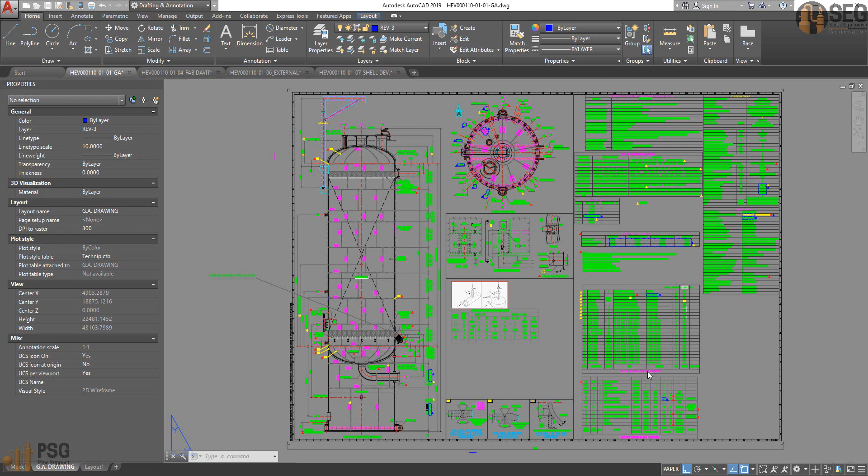This is Ahmed Hijazi, and today, inshallah, we will make this vertical vessel by using SEG software. As you can see on this vessel, on the bottom head, you have segmental pieces on the bottom head, and each course of the shell courses includes 3 welding lines.

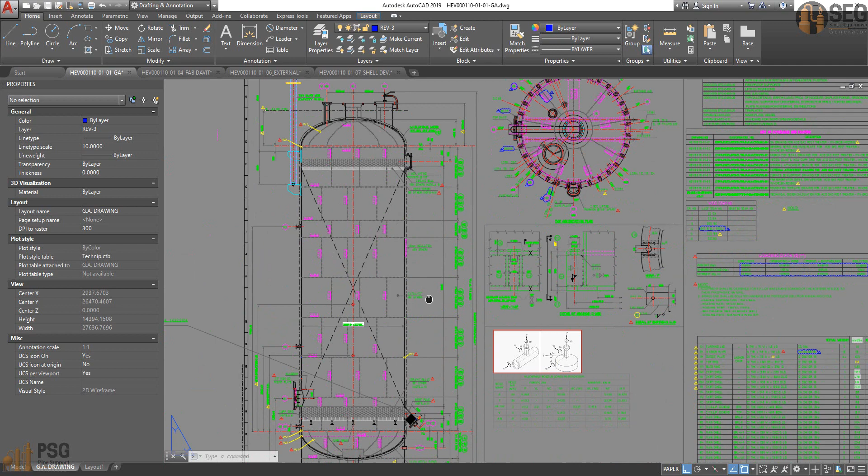And if we take a look at the top view, we can calculate the number of segments on the top head, and from here we can get the orientation of the longitudinal welding lines. Here on the support skirt, you can figure that in this skirt we have 3 cans. Here's the first can length, thickness and material, and the second can and third can information.

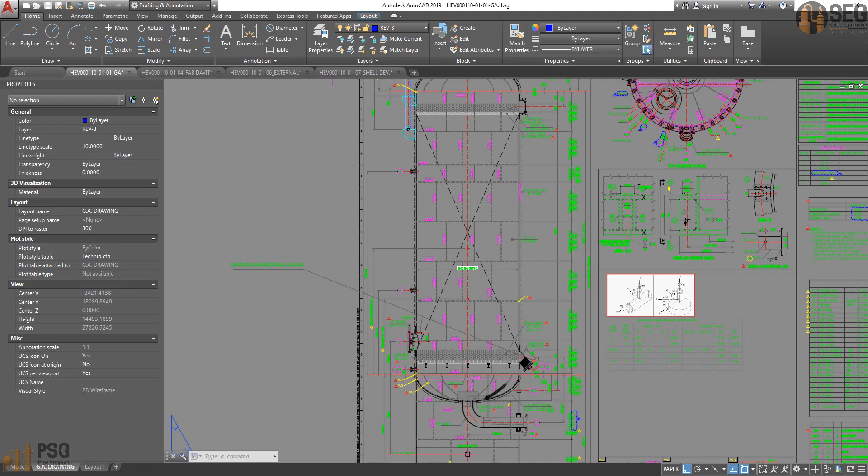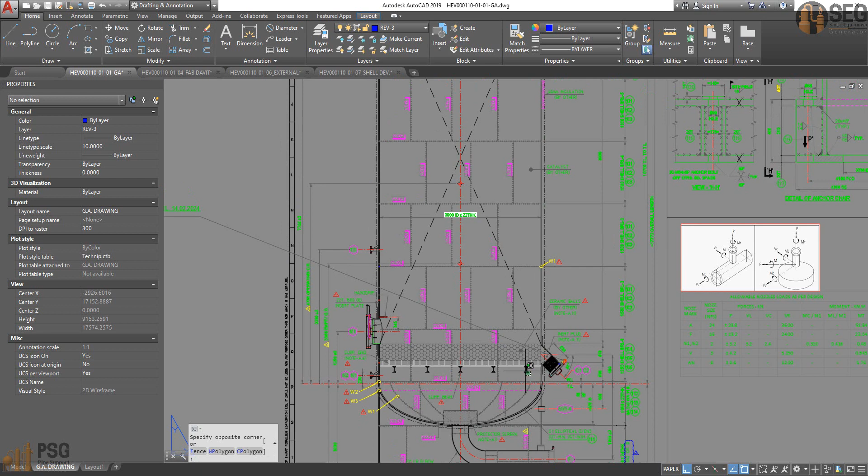Now let's start creating the main vessel items by using SEG software. In this part of the tutorial, we will create the main elements of the equipment, like the bottom head, all cans, the top head and the support skirt. In the other parts of the tutorial, we will discuss the other parts like nozzles and the top davit. After that, we will discuss the internal components like the support beams and some of the external components like the platform clips. Okay, now let's start our project from new.

We will create a new project, and from here let's add the vessel name and select the project location, select the desktop, and from here let's select the vertical pressure vessel and select finish. By selecting finish, SEG will start creating the project folder on the defined location. Here we have the vessel name, and now let's edit the equipment setting.

Here, as you can see, the position automatically becomes vertical and starts the assembly direction from bottom to top. You can define the service, you can change the vessel name from the tag, you can add a serial number. Now let's define the plate length to be 6 meters and the plate width as 1.5 meters. So from here the available plate dimensions will be automatically

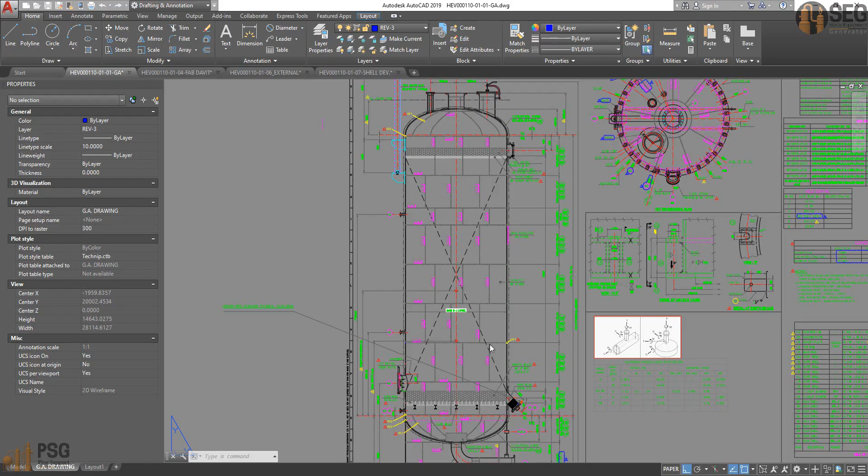used in SEG. We can change this value to 5 meters, because if we take a look at the bill of material here, the maximum plate length is defined as 5 meters by 1.5, so we change it to 5 meters by 1.5. And now let's click save. Now let's add the first element.

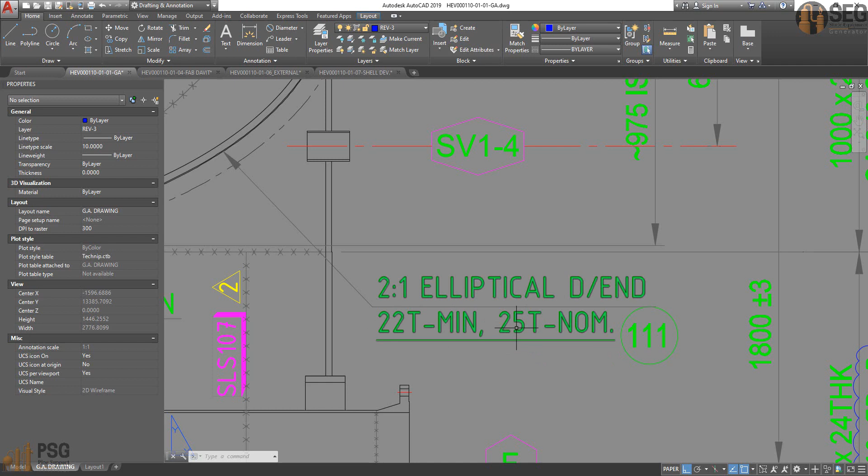If we take a look again at this bottom head, we can figure that it's an ellipsoidal head 2:1 with minimum thickness after forming 22 and nominal thickness 25, and here the straight flange is 50 millimeters. So from here let's add the first head, which is the bottom head. Let's select the ellipsoidal head with crown and knuckle radius,

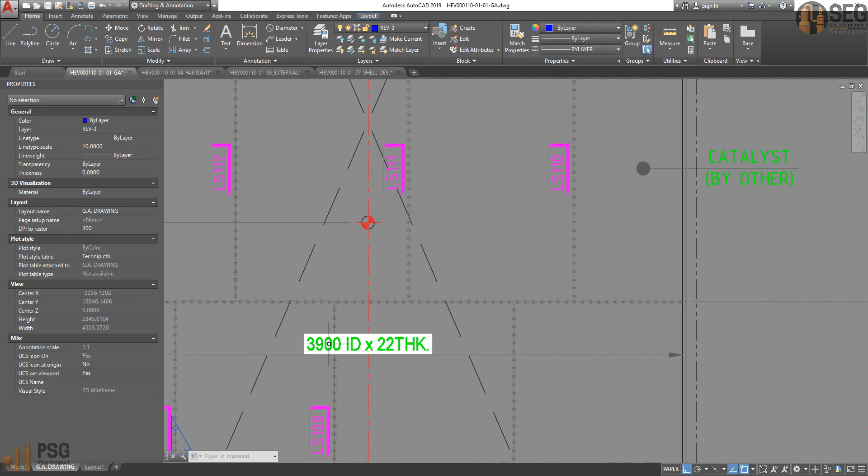and from here let's define the inside diameter. It's 3,900. If we take a look here at that value, we can get the inside diameter for the vessel. So here we define the inside diameter, and for the thickness, the nominal thickness is 25, straight flange is 50, and minimum thickness after forming is 22.

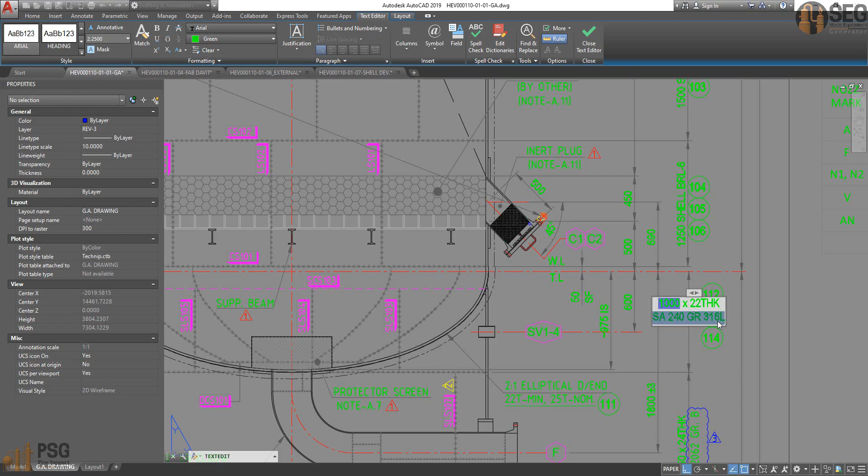And the material of this one, if we take a look here, it's SA, so we can copy that value and paste it here directly, or you can search for it like 240, so you will get the grades, and you can select the grade directly from the list, or you can type it from here.

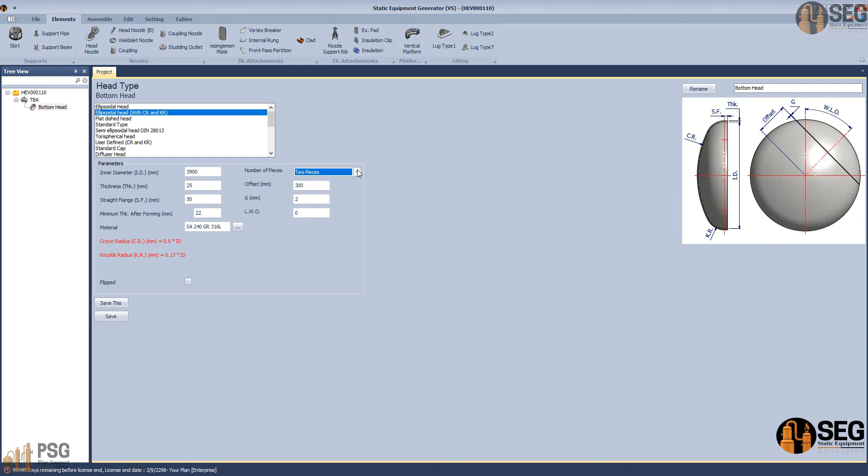This head is not a one-piece head, it includes segments. If you select the second type, you can figure that it includes a single welding line, but when you select more than 2 pieces, you can add some segments to the head. Now let's take a look at the top view to calculate the required number of segments. Here we have first, second, third, fourth, fifth. Now we have 9 segments in this head.

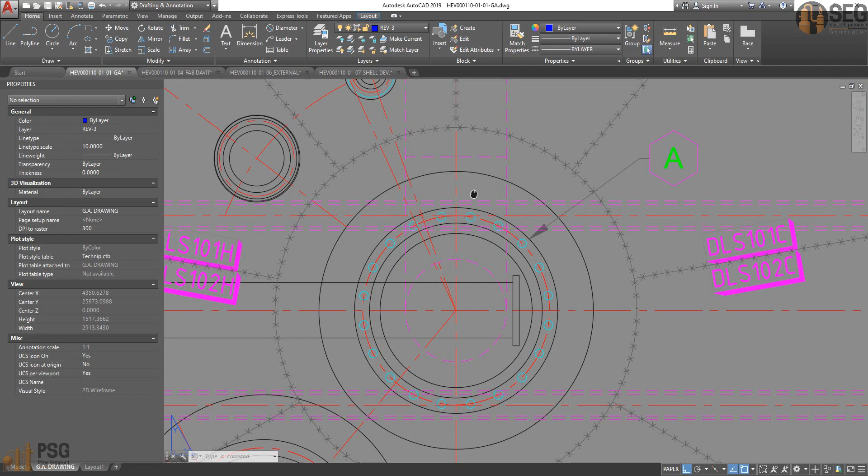So from here, let's add the number of segments as 9, and let's measure the cut length. Let's get the diameter tool, and here it's 1450. So let's define that as 1450, define the gap as 0, and the first longitudinal welding line orientation is at 0 degrees. So we will keep those values like that and click on save.

Now when you click on start assembly, SEG will automatically start creating the assembly of the equipment and creating the head assembly as a head from segments. As you can see here, everything runs in the background.

Nothing appears on the window, but after creating the head assembly, it will be assembled to the final assembly of the vessel. So if you would like to make a rendering for the element during creation, there is an option that gives us this ability.

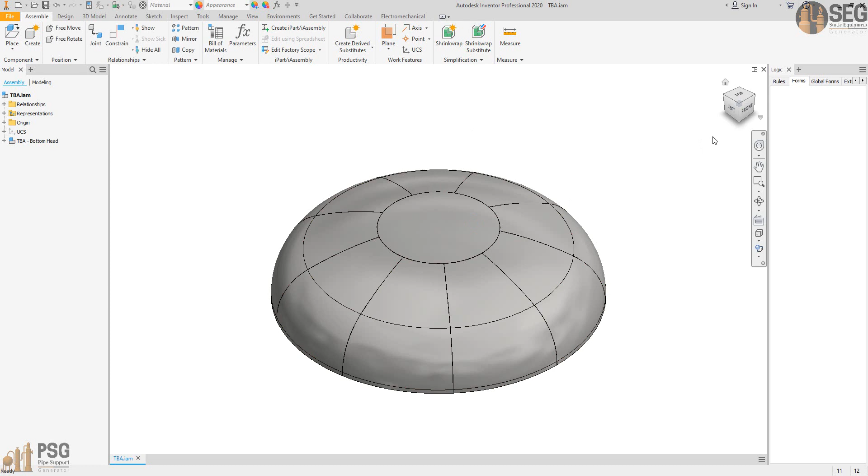Okay, as you can see here, the head is not in the correct direction. So we need to flip the direction of the head. So from here, we need to select the flip direction. That's the first point. And on the second point, as we discussed, we will need to make a rendering for the elements as a parent or a child during creation.

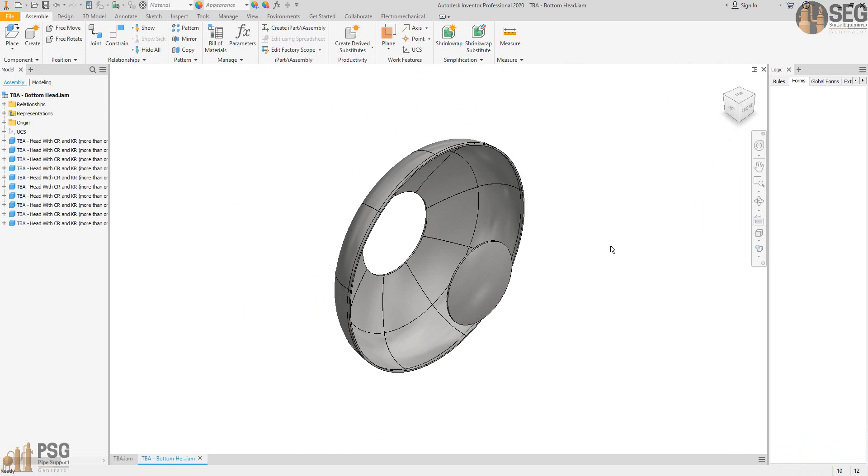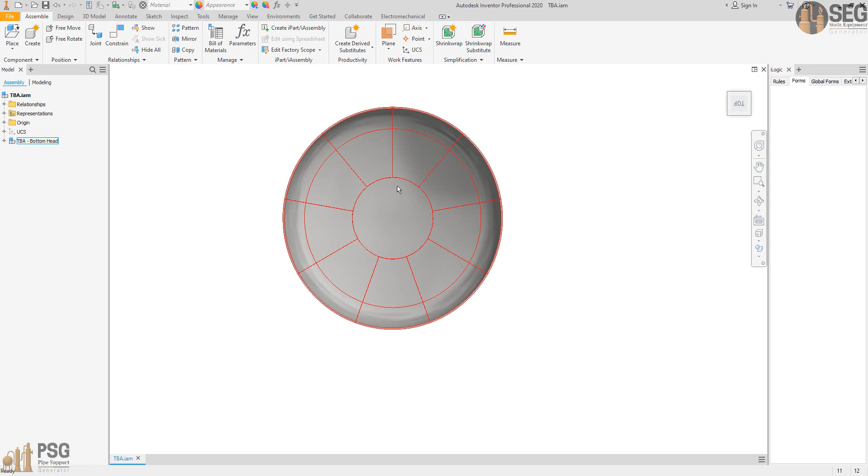So from here, let's select those options, and from Start Assembly, let's rebuild the head again to adjust the direction of the segments, okay, to make this head with a flipped direction. Okay, now this head will be assembled, and now we have this head. If we take a look from the top view, like that, as you can see, the first longitudinal welding line orientation at 0 degrees, it will be like that.

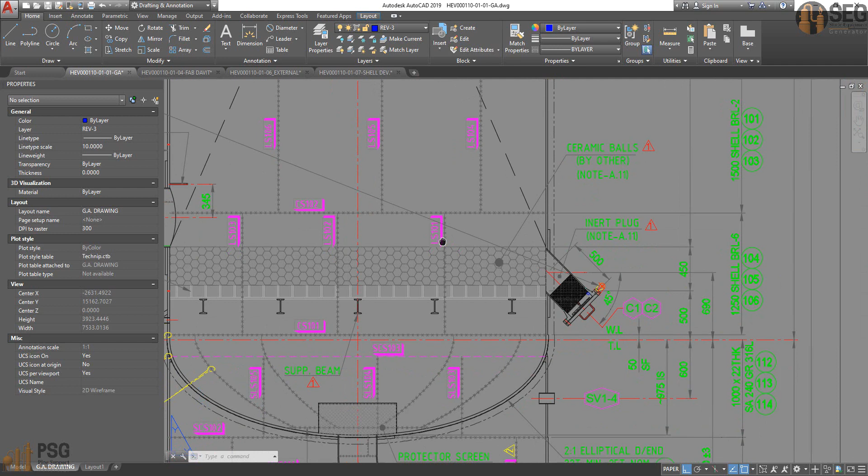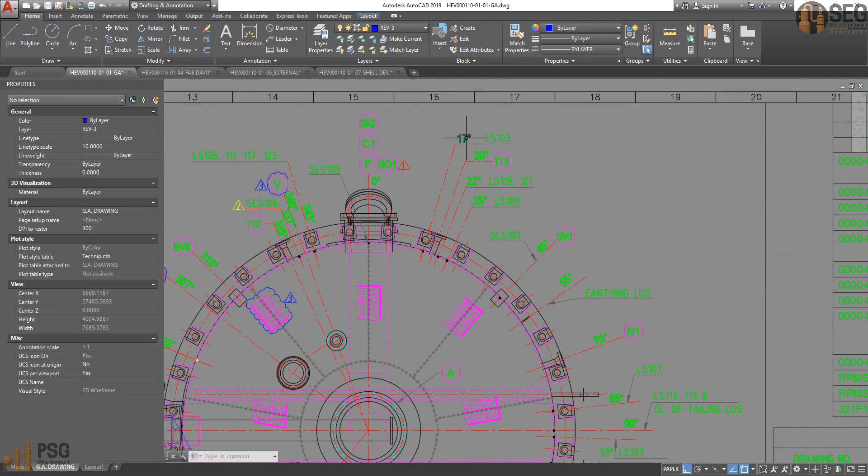Now let's add another element, which is the first can. So from here, if we take a look again at the first can, which is that one, it's 1250. Okay, and here we have 3 welding lines, LS101, LS102 and LS103. So let's check the orientation for LS101 on the top view. It's at 85 degrees. And the second one is at 231, and the last one, LS103, is at 17.

So now let's select the suitable item for that. From elements, let's select the vessel node. After that, select the can, and let's add shell 1. And from shell 1, let's select from this list shell from different pieces, which is that item. That item will give us the ability to define the required number of shell plates inside this can, and we have the ability to control the length of each one.

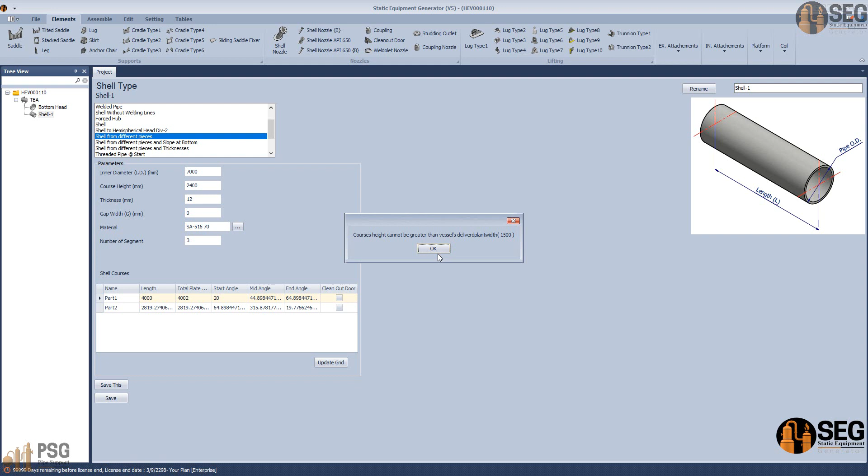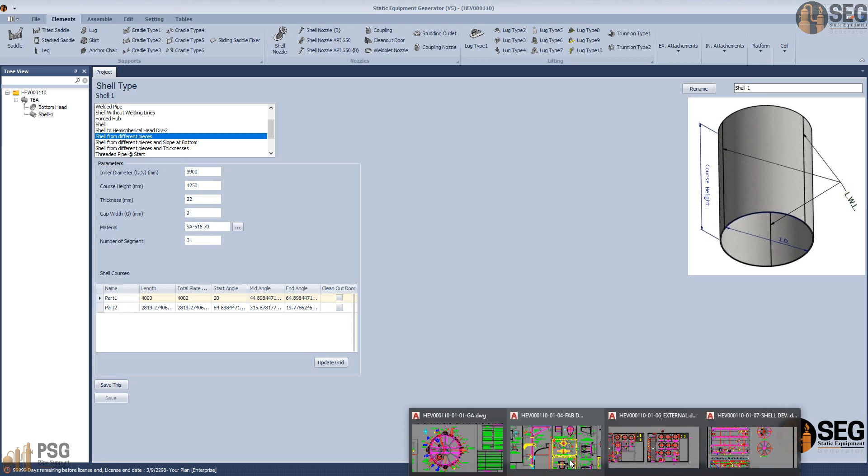Now let's define the inside diameter of the can. It's 3,900, and the height is 1,250, and the thickness is 22 millimeters. For the gap we could keep it as it is, and for the material we can copy the material directly from here like that and paste it here. And for the number of segments, we have 3 welding lines.

So if we change this value to 5 meters and click update, as you can see here, SEG calculates directly the length of the last one, because we defined the plate length in the setting of the delivered plate dimension option. So from here, as you can see, the length of this first plate becomes 5,000 millimeters.

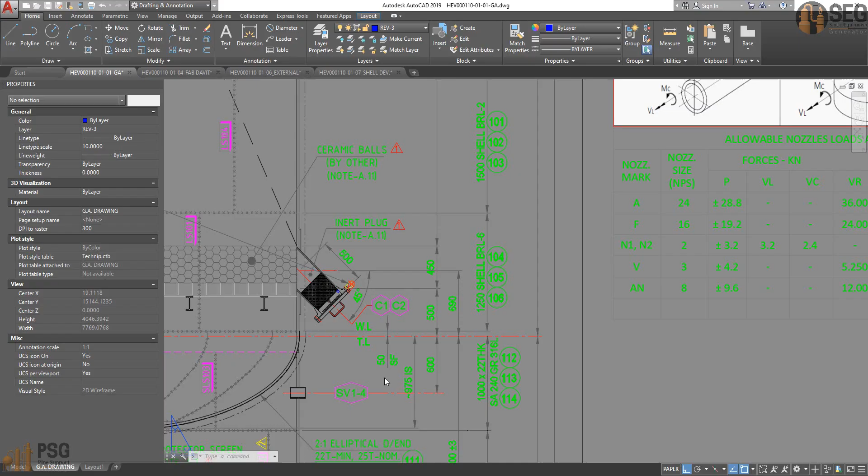And now let's define the longitudinal welding line orientation of the first can. It's at 85 degrees. And now when you click on update, as you can see, the longitudinal welding line orientation when the length of the first can is 5 meters is 231. So let's take a look here. The first longitudinal welding line is at 85 degrees, and the second longitudinal welding line, LS103, is at 231. So that's the accurate value for the longitudinal welding line orientation.

Automatically, when you add the length of the second shell plate, the longitudinal welding line orientation for the last can, which is 17 degrees, is calculated automatically. As you can see, SEG calculates the actual values for the longitudinal welding line orientation based on the length of each shell plate and the first longitudinal welding line orientation.

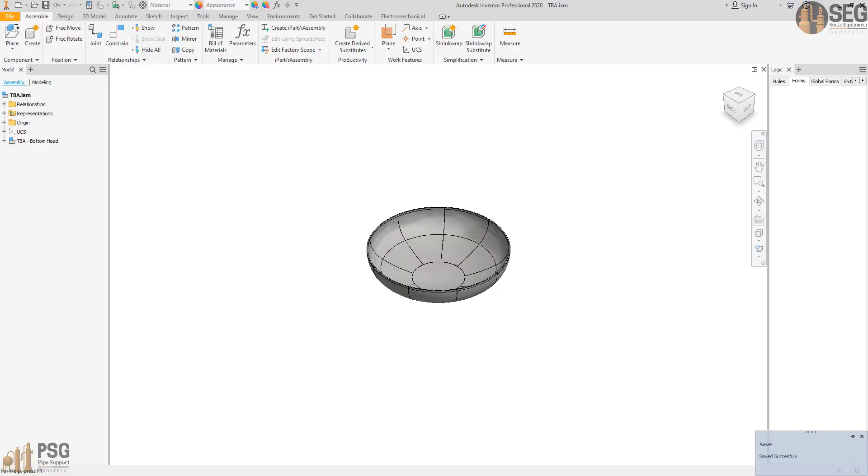Now let's click Save, and from the Assembly tab, let's click on Start Assembly to start creating the first can. Here, as you can see, we can make a rendering for that element during creation, and each plate will be assembled manually and will be assembled after that with the final assembly of the vessel.

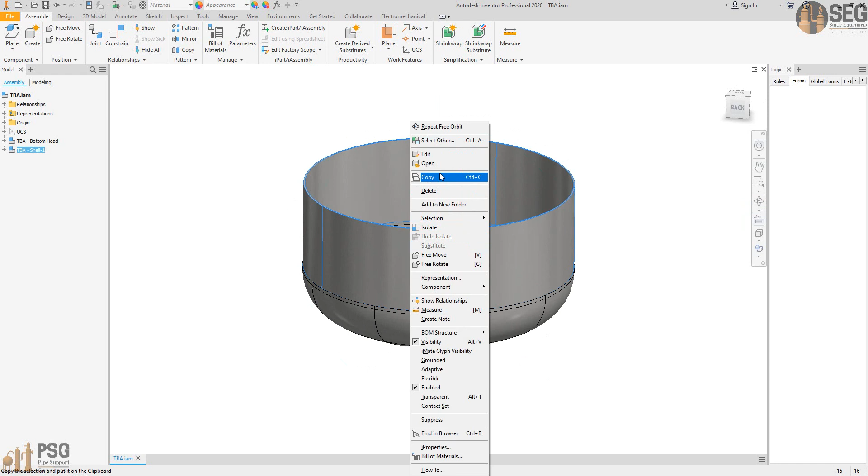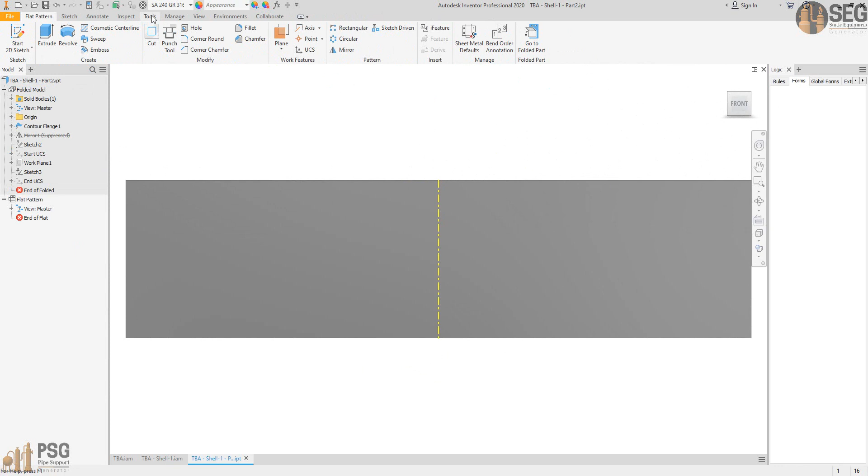Now let's open this can to check the length of each plate. For the first part, let's open it like that, and from Get Sheet Metal Development or Get Flat Pattern, you will be able to measure the length. As you can see, the length of this plate is 5 meters, as we defined on the form. Let's open the second part and check its length. We get the flat pattern, and from the Inspect tab, if you measure it with this tool, it's 5 meters.

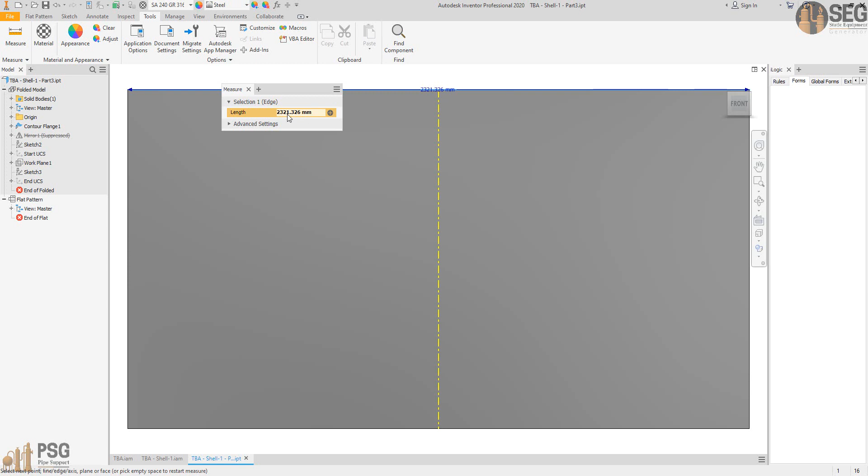So here SEG automatically calculates the third plate arc length based on the inside diameter of the vessel, the thickness of the vessel and the previous parts' arc lengths. Here we have the actual length for the last part of this can. Okay, now as you can see, we have the first can with the longitudinal welding line orientation. Let's add the second can. So from elements, let's add shell 2.

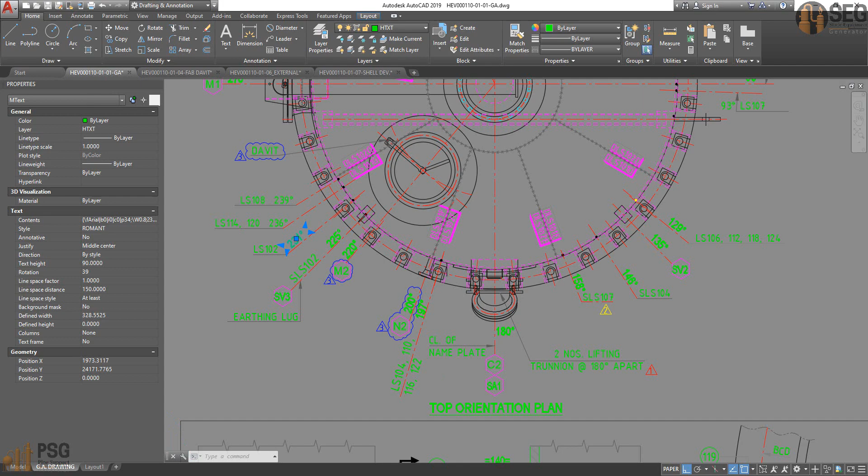And let's make it look like shell 1 and click on Add. Now we have the second shell, and from here let's define the length of the second shell. So let's take a look at the length. It's 1.5 meters. So let's change the value from here, and let's change the first longitudinal welding line orientation for the second can. It's 198. And from here, let's click on Update and Save.

And let's add the third can, shell 3, and let's make it look like shell 2. Okay. And from here, let's change the length and the longitudinal welding line orientation. So from here, the first longitudinal welding line orientation on 93, and click on Save, and the same length with the same thickness.

And now let's add the fourth, shell 4, and let's make it look like shell 2, and click on Save. And now when we select it, we need to define the longitudinal welding line orientation for the first can, and click on Update. Now that value is right, and here now it's okay.

Let's add another can, which is shell 5, and shell 5 will be typical to, let's make it look like shell 3, and from here we will keep those dimensions as they are. And for the first longitudinal welding line orientation, it's on 90 degrees, and click on Update. And now let's click on Save.

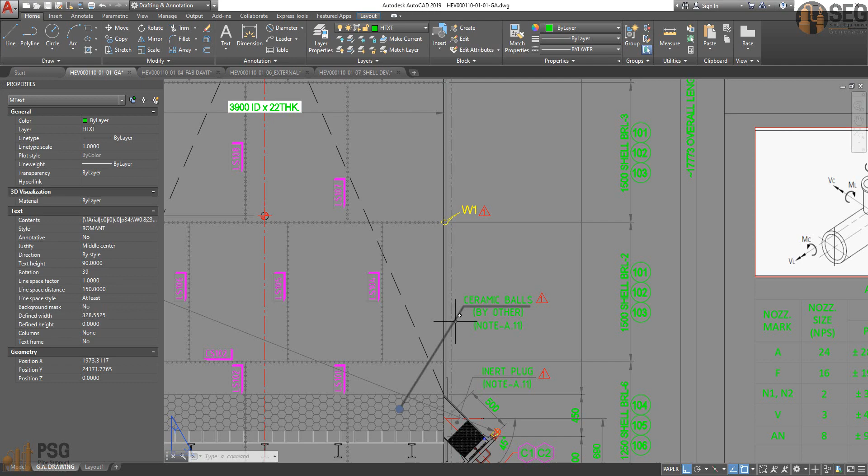Let's add can 6 here, shell number 6, and let's make it look like, let's say, shell 1, no problem. And from here we will need to change the length, because shell number 6 is 650. Okay, so we will define it as 650, and for the longitudinal welding line orientation we will make it 197 and click on Update.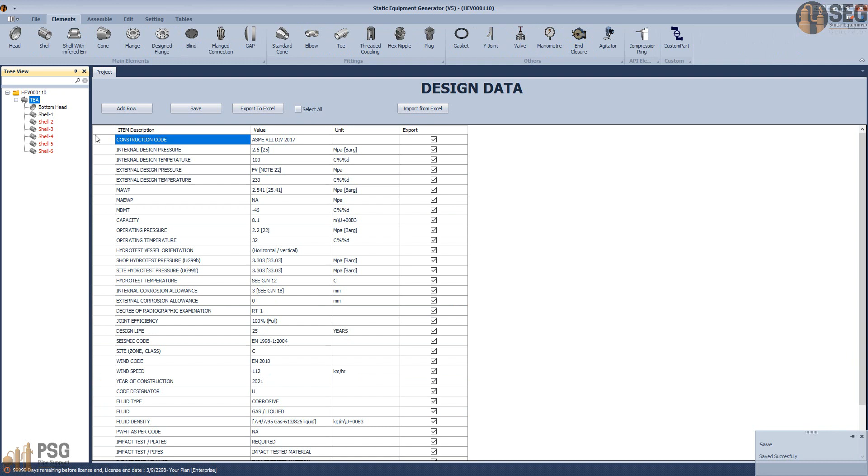Now let's click on Save, and for can number 7, let's make it look like can number 5, and it's with 1.5 meters length. No, it's 1,250. That's the length, and the longitudinal welding line orientation is okay.

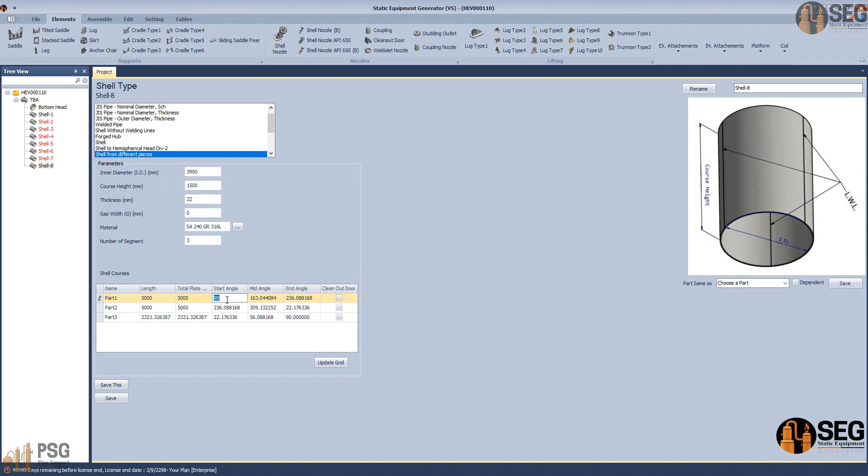And for can number 8, shell 8, let's make it look like can 5. So from here, it's 1500, and the longitudinal welding line orientation will be 197, and click on Update. And now let's click on Save. Now let's add the last element, which is the top head, and we will make it look like the bottom head, and click on Save.

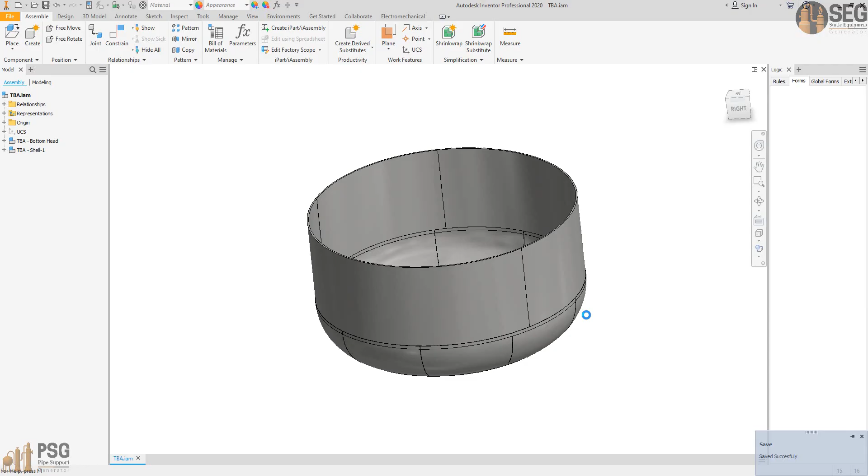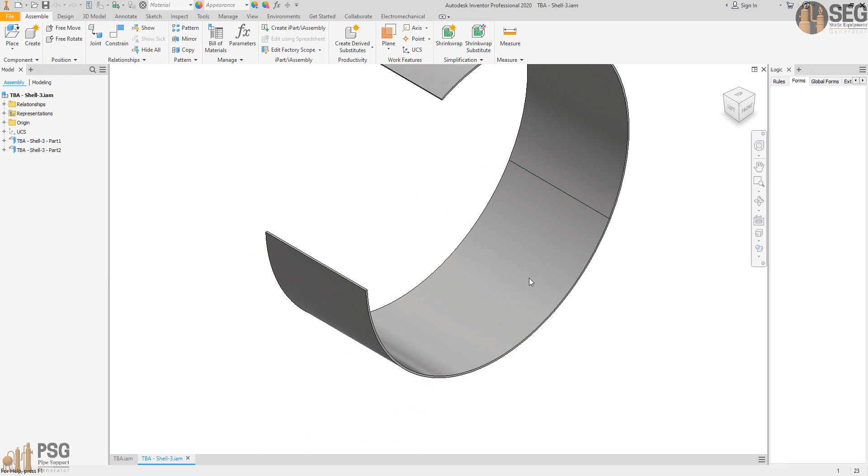And the only thing we will do here is removing the flip direction to make the direction of the head on the correct side. Now let's click on Run the assembly to start creating the second can, which includes 3 shell plates, as we defined in the SEG software. Okay, as you can see here, we have the assembly for all cans.

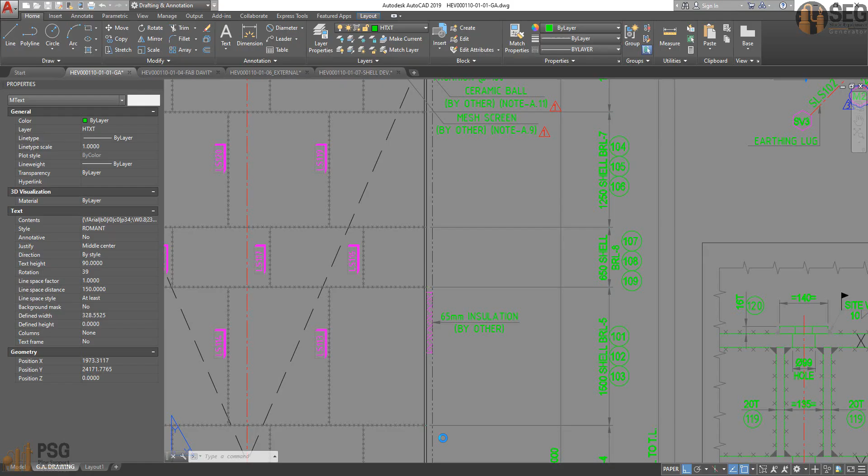After that, on that part, we will define the skirt parts, and inshallah in the next parts we will define the nozzles on the shell. And as you can see, if we take a look here at the general arrangement drawing, we have a tilted nozzle here, we have a manhole with davit as a horizontal nozzle, we have other nozzles with supports. So how to define those supports in SEG software?

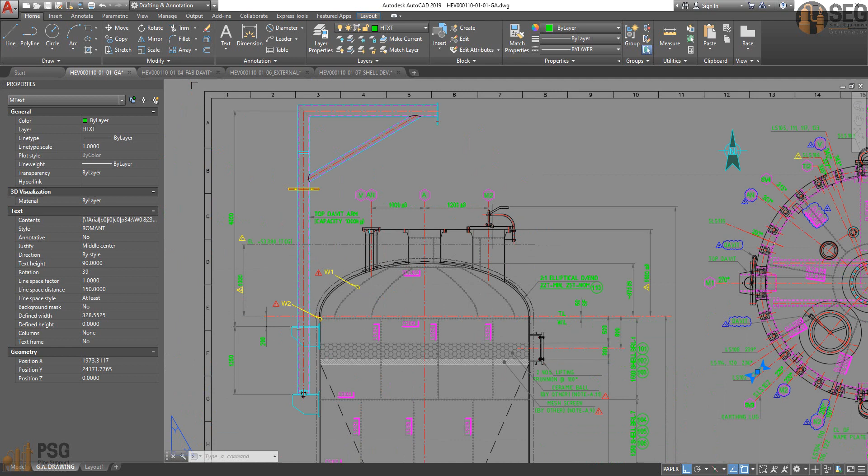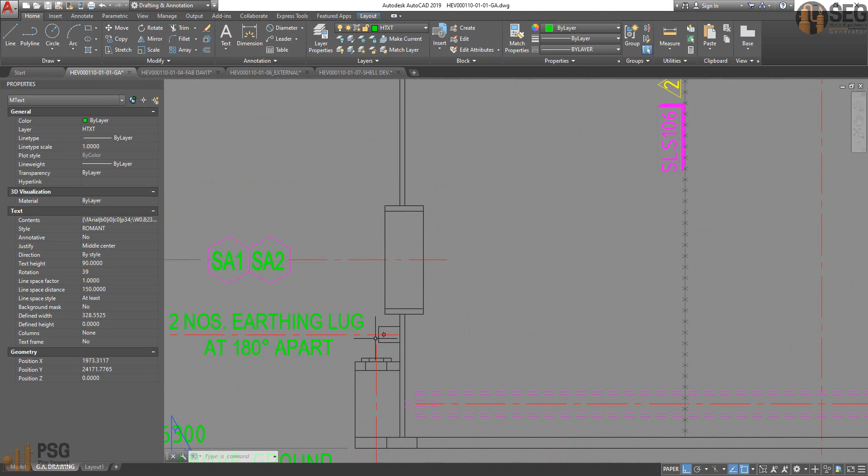We have top head nozzles, so we will need to define the top head nozzles, and one of them with a top davit. So we will learn in the second part of this video how to add those nozzles on the top head, how to make the saddle nozzle vents or skirt vents, nozzle opening and skirt access, and how to add an external item like the earthing lug. But in the first part we will discuss how to generate the main items and the support skirt.

Now can number 7, we have one more can, which is can number 8, which is shell 8. After that, the top head will be generated.

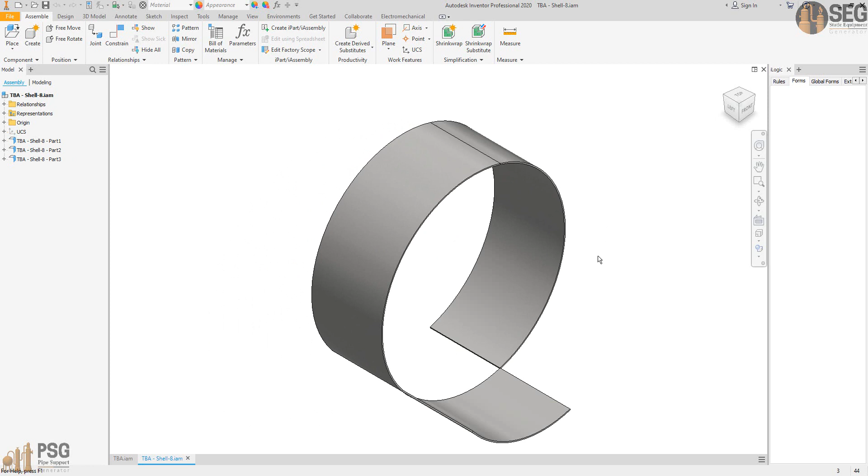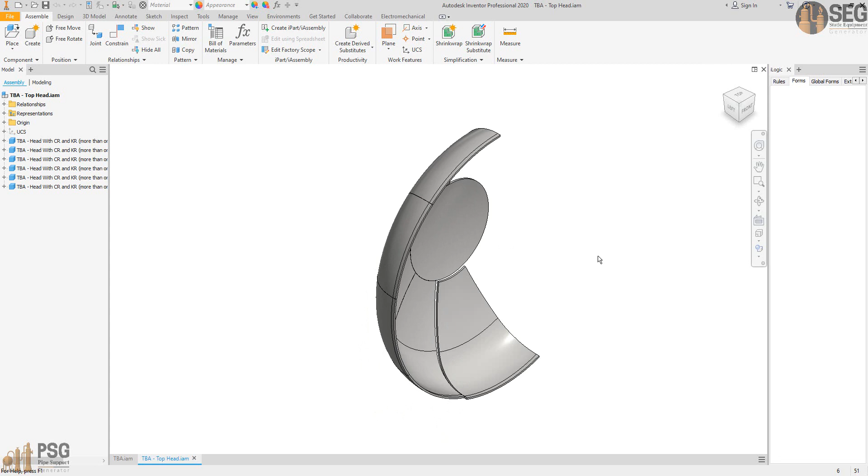Okay, now as you can see, all cans generated and assembled automatically. Now the last step, which is the top head, as you can see, it's generated from segments, and each segment of those is a separate part. You can deal with it and get the weight of each segment if you would like, get the surface area for each part. Now you have a 3D CAD model, you can deal with it.

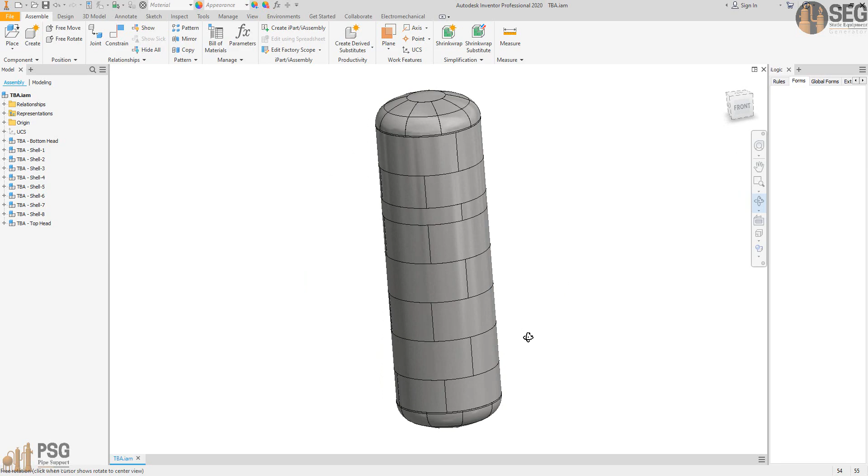Now we have the complete vessel, as you can see. Now let's add the skirt on the bottom head. So let's select the bottom head, and from elements you can figure that you have a list of elements you can add to the bottom head. Let's select the skirt and define the name of this element as a skirt. And from here you will find 2 types. The first type is a shell from plate, and the second one the shell from pipe.

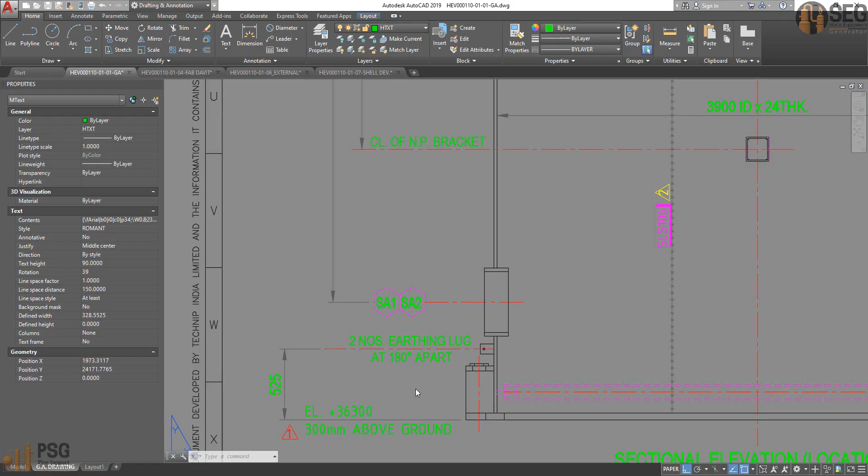Let's select shell from plate to define the inside diameter. Let's keep the values as they are, and the thickness. The thickness of the skirt is 24 millimeters. Let's check the drawing here. The skirt main thickness is 24, and here we have 3 cans. The first can here with stainless steel material and with the thickness 22, and the other cans with different thicknesses, as 24, and with different lengths.

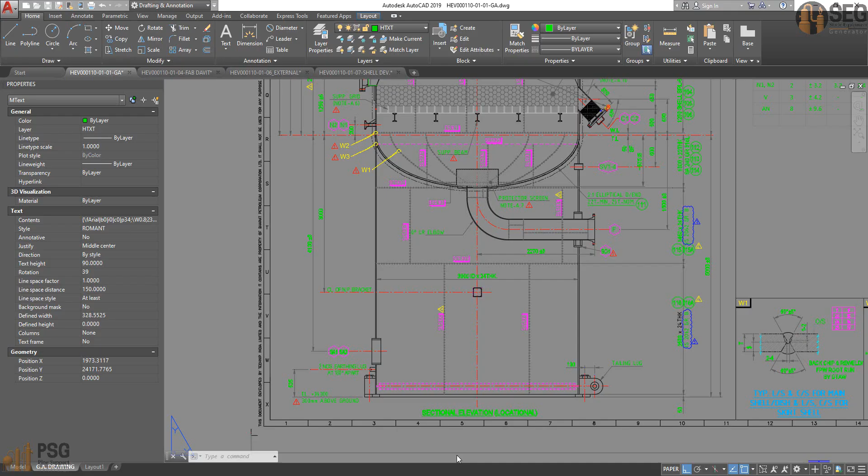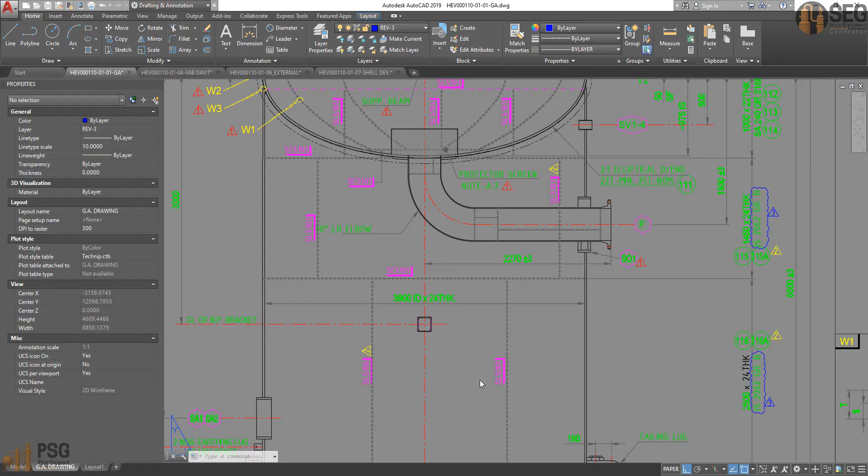So how to add those cans to SEG, and one more thing, which is how to define the longitudinal welding line orientation per each can. Okay, now let's come back to SEG and fill those values. Here, the first longitudinal welding line orientation on the bottom can, the last one here, it's at 24, and the total length of this can is 5 meters. Let's take a look at the drawing here. The total length of this can from the tan line to the bottom of the base plate is 5 meters. So the total length is 5 meters, and here the gap, let's keep it 2.

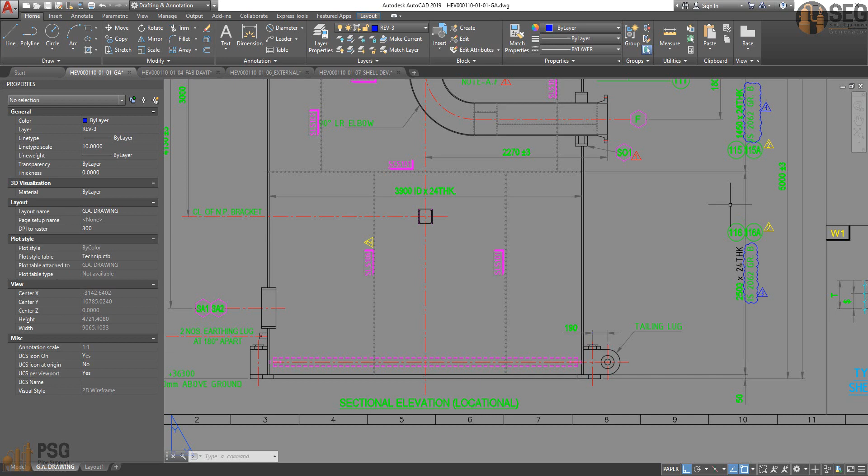And for the material, let's take a copy from this material and paste it here. And the number of longitudinal welding lines per that sheet, if we take a look, we have 2 longitudinal welding lines on that can. So let's define them as 2. And for the first skirt plate, we need to select this part, and from here we will need to define the material of that one. So we will take that material, define that one, and the length, as we can see, it's 1 meter. So let's define it as 1 meter.

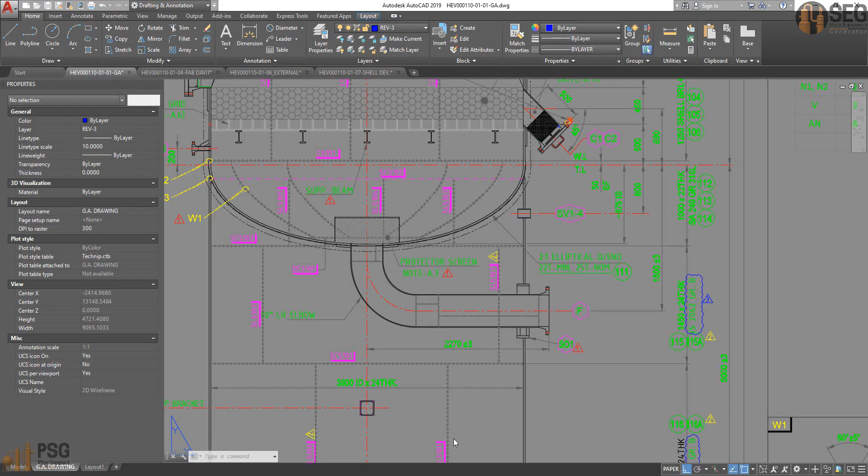And from here, the longitudinal welding line orientation for this can, we can check it from here. So it's at SLS 103. So let's come back here. SLS. So let's assume it at, let's say, 45 right now, and the plate thickness of this can is 22. It's not 24. So if we come back here to check, the thickness is 22. So we will need to define the thickness of this one, and here we have 3 longitudinal welding lines.

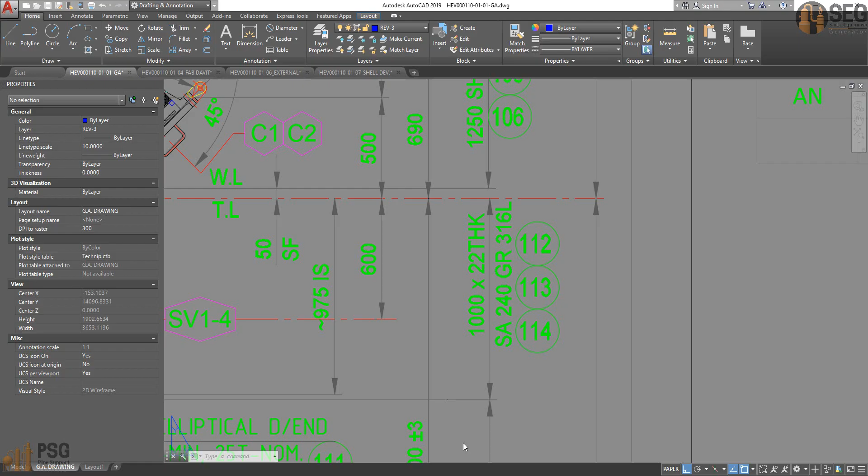And from here, let's select another skirt, and let's define the material of the second part. So that's the material of this one, and the length of this can is 1450, and the longitudinal welding line orientation, let's assume it at 90 degrees, for example, right now, and we could modify it after that. And the thickness is 24, and the number of longitudinal welding lines is 2. We have 2 longitudinal welding lines.

Okay, now let's add the dimensions of the base ring. The base ring inside diameter, if we take a look at that detail, we can get the inside diameter and outside diameter and bolt circle diameter from this view. So let's define the inside diameter of the base ring, the outside diameter, and here that's the thickness of the base plate, it's 50 millimeters, and the bolt circle diameter is 4168.

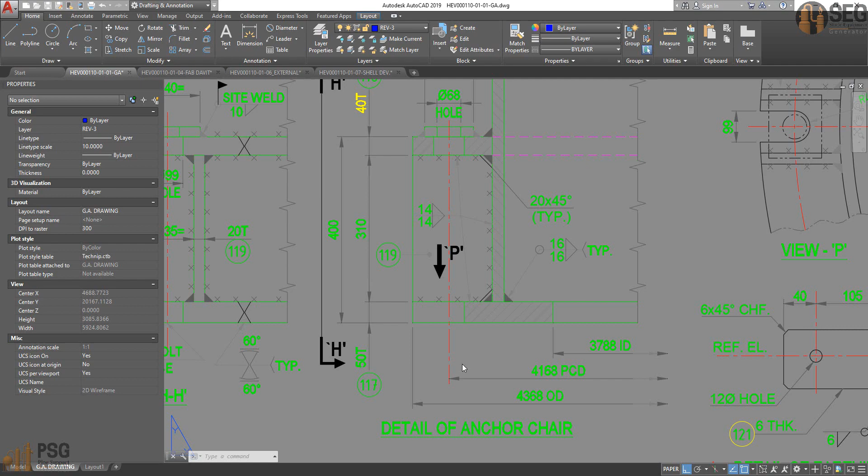And the hole diameter is 99, and the number of holes, so let's take a look at the number of bolts per quarter. So it's 1, 2, 3, 4, 5, 6, 8, 9. We have 9 bolts per quarter, so it's 36. So let's add here the number of bolts like that, and the material of the base ring, let's select the same material here. Okay, and if you would like to add a pipe sleeve, you can add it from here.

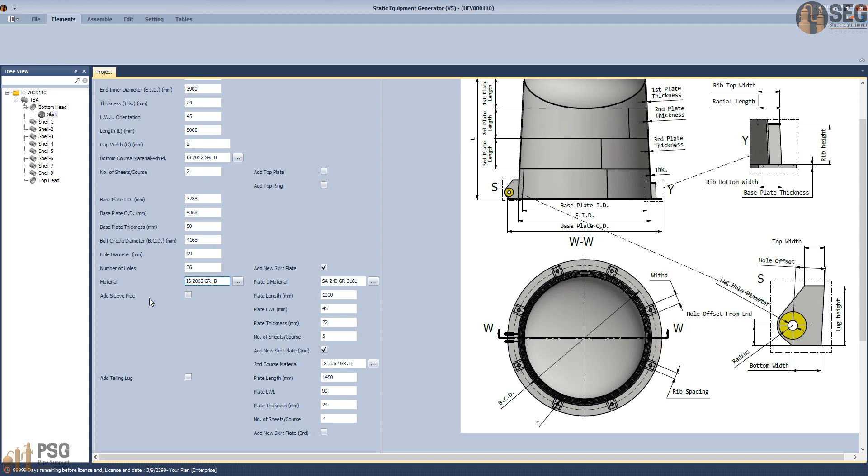Now let's add support ribs. So from here, the rib spacing is 135. If we take a look at that detail, sorry, here that's the detail. Okay, so that's the spacing, and the bottom width is 210, and the height is 310, and the top width is the same as the bottom width, and the rib thickness is 20.

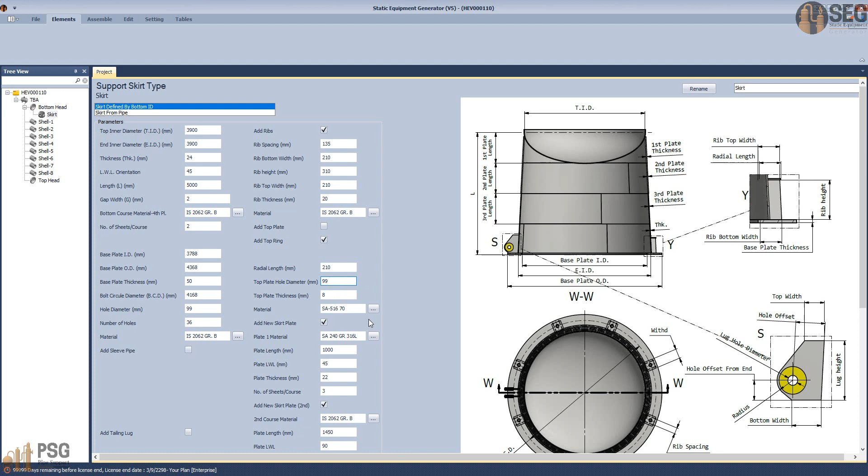And let's change that material, and we have a top ring, so the radial width is the same, and the hole diameter is 99, and here the plate thickness of the top plate is 40 millimeters, and here the material of that one. Now let's add a tailing lug.

So from here, let's add the tailing lug, give it the same material, and the top width of the tailing lug is 300. That's the bottom width, and same for the top width, and the lug height is the same of the spacing between the top and the bottom ring.

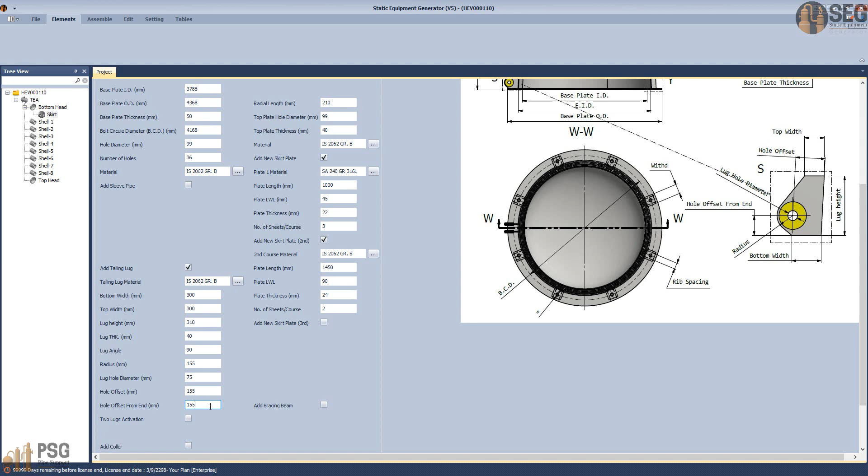And here the lug thickness is 40 millimeters, and the lug angle is 90 degrees, and the radius is 155, and the hole diameter is 75, and the hole offset on the half thickness 155, and the hole offset from the end is 155, but that value will be 300, like that. And actually we have two tailing lugs.

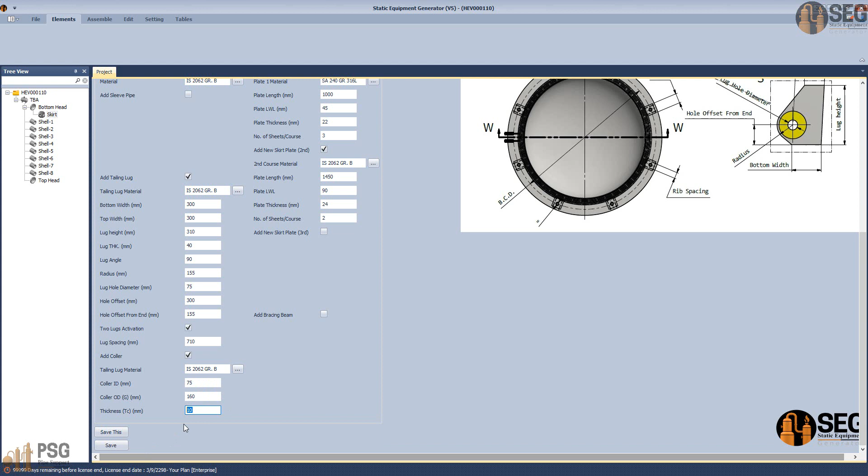Now we can define the spacing between them as 710, and as per this drawing, we have a collar here around this lifting lug, so we will add it. Let's change the material, and the inside diameter of the collar will be the same as the inside diameter of the pin hole, and the collar outside diameter 160, and the thickness, let's say 16 millimeters. Okay, and click on save.

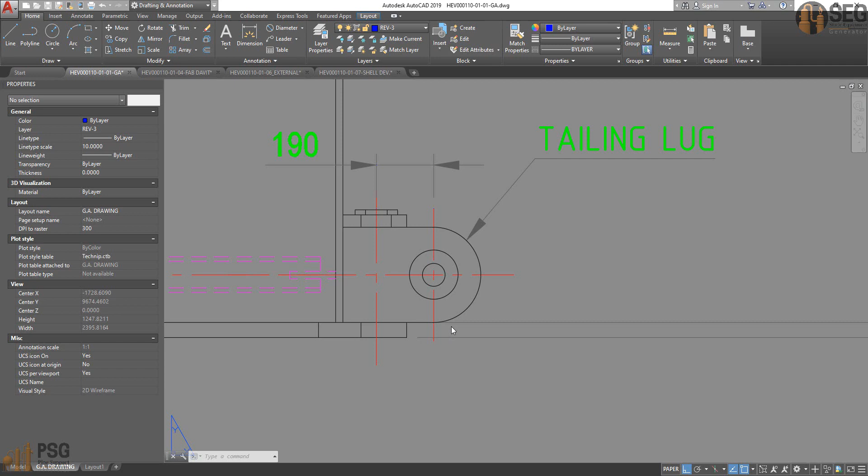And if you have a bracing beam, you can add a bracing beam from here. But the available shape here is hot rolled sections such as HEA or IPE, not a pipe. Here on that model, you can figure that it's a pipe, not an HEA or an HEB or I section or H section. So that configuration, we can make it manually by using the features of Autodesk Inventor. Okay, so let's remove that one and click on save.

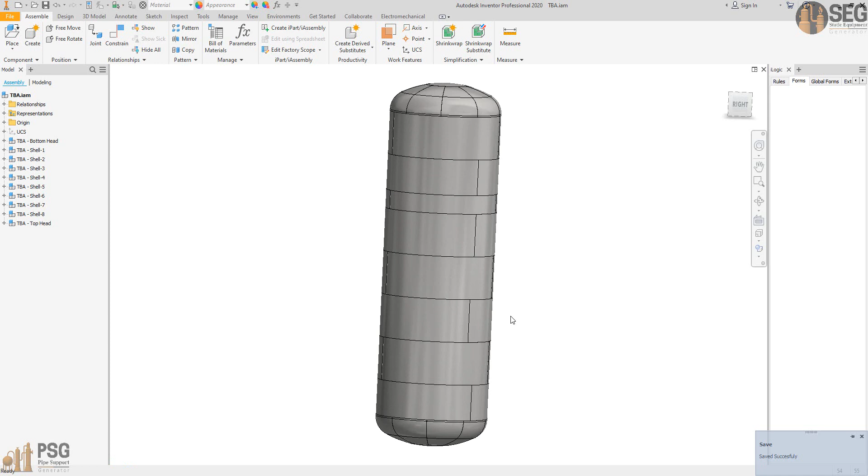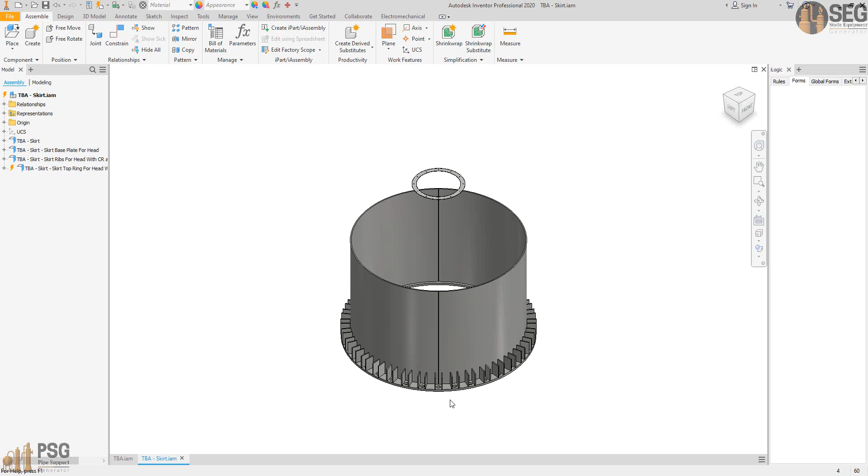Now let's click on start assembly to start creating the skirt components and assemble it to the final assembly of the vessel. Here that's the first or the bottom can on the skirt, which includes, as you can see, two longitudinal welding lines, and here that's the base plate with the holes, and we will make a modification on the hole of the base ring to make it a slot hole, not a straight hole. You can do that easily, but let's finish the assembly of the skirt.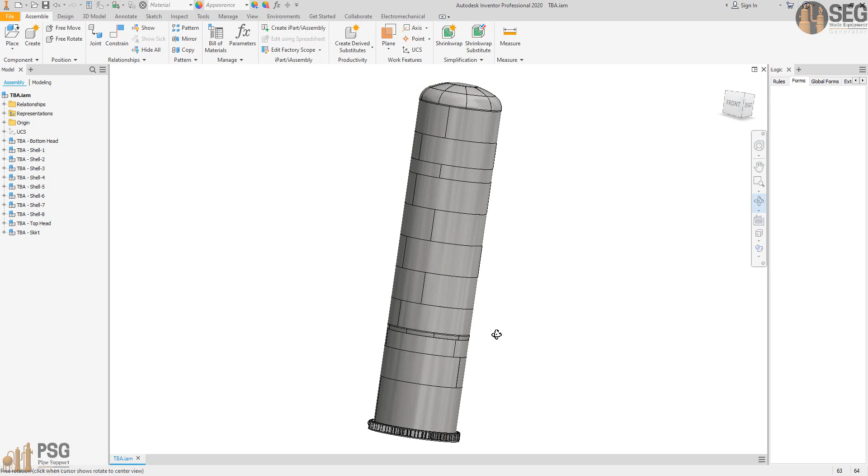Here that's the top can, and here the intermediate can. As you can see, we have two longitudinal welding lines on the mid can, but the top one we have 3 cans. Finally, we will generate the lifting lug with the defined spacing here. Now we have the skirt. If we take a look, we have the skirt with 3 longitudinal welding line orientations on the first can, and for the second and third can it will be like that. And here, as you can see, we have the tailing lugs like that.

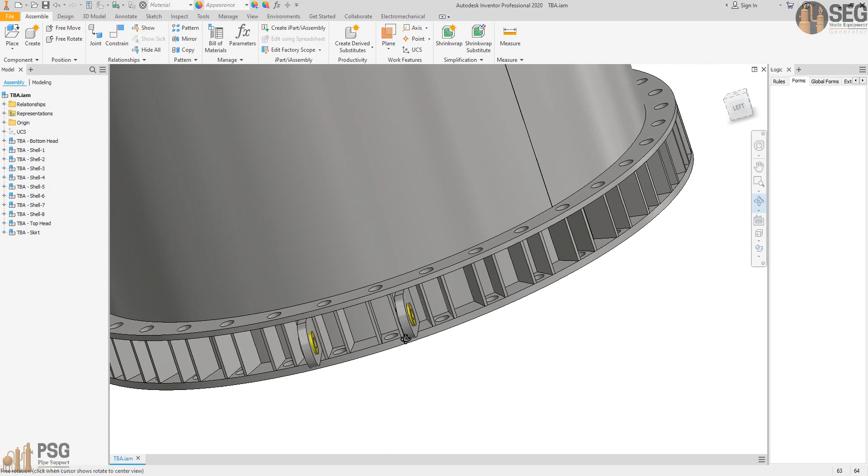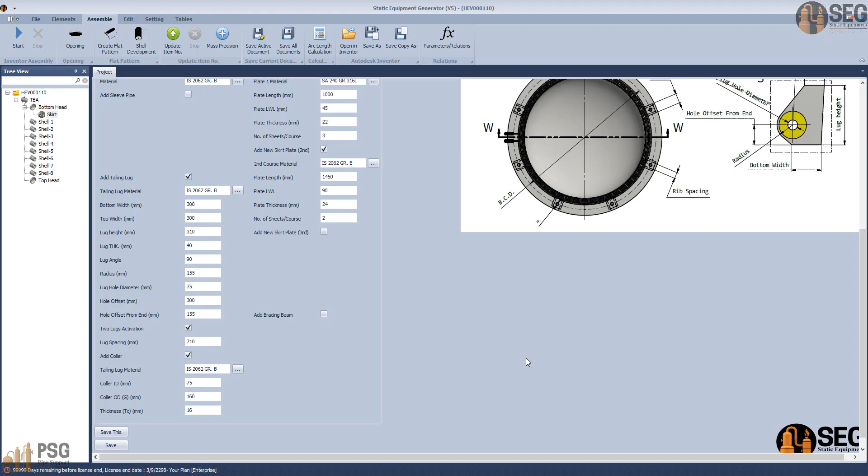Okay, now let's go to another part, which is modifying the base ring. So let's open the skirt and make a little modification on the bottom ring. Let's open it here, and if you take a look, you can figure that the bottom plate includes a slot hole. It's not a direct hole, so we need to make a modification on that directly.

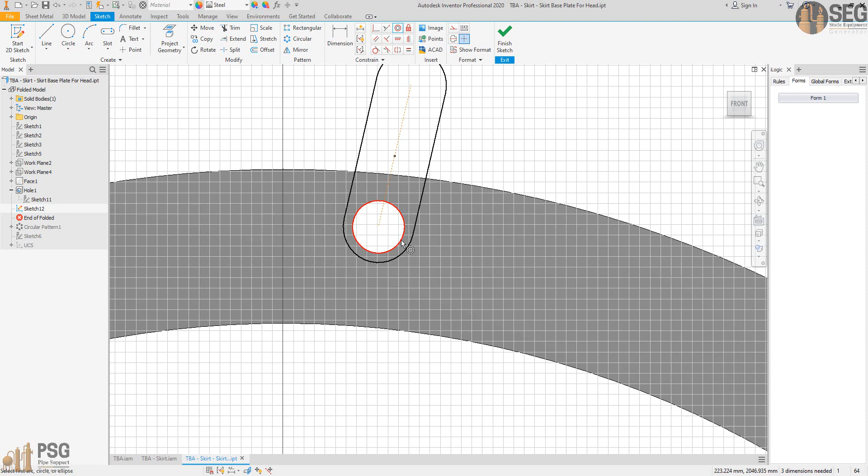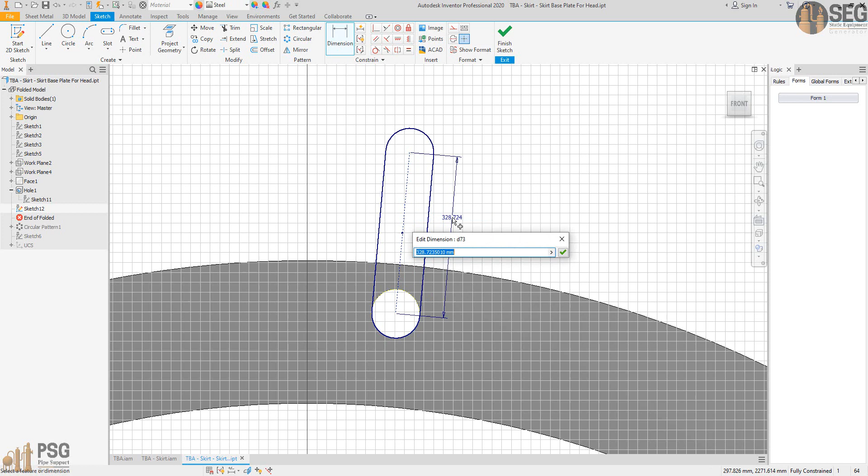So let's keep that pattern like that, and from here let's make a modification and project this one, and from the slot holes let's select a hole like that. Okay, and let's make that hole equal to that one, and finally we will make that line cross along that one. And as you can see here, this one will take the same orientation as that one. Now the last thing, we will make that diameter equal to that one and define the length of this one to be, let's make it 100 millimeters, or a little bit longer, sorry, 150, like that.

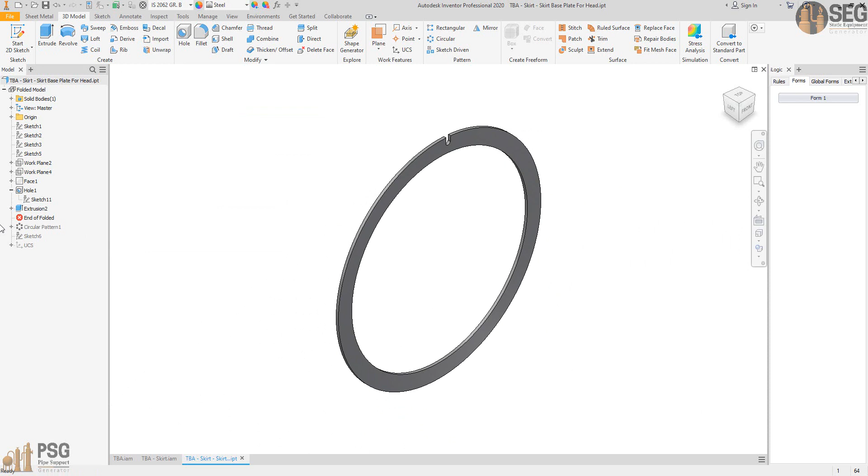And finally, let's click on extrude cut. Let's make it extrude cut on the two sides through all. So the hole will be like that. Now let's select that one, and during selecting the pattern, let's select the extrude feature, and now the base ring will be cut like that. Okay, as you can see, we made that modification.

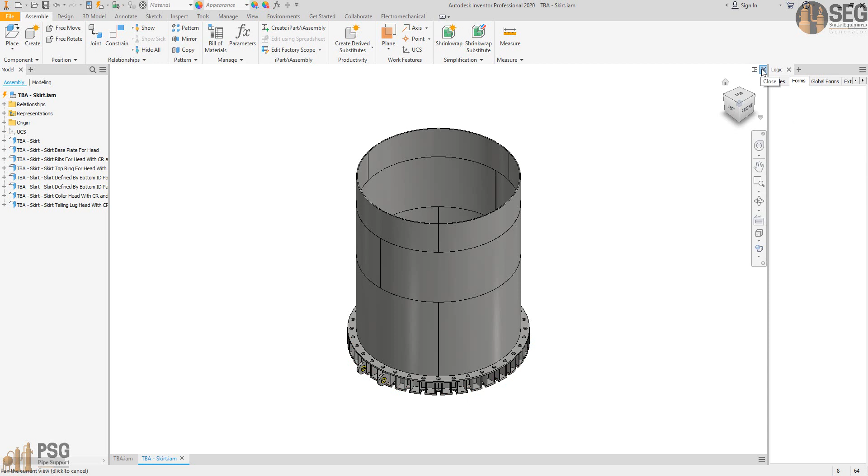Now we have one more item to add to the skirt, which is the top washer, and inshallah we can continue with the next part by adding the washer to the skirt and adding, as mentioned, the earthing lug to the skirt. After adding the nozzles, we can make the skirt vents, skirt opening, and skirt access.